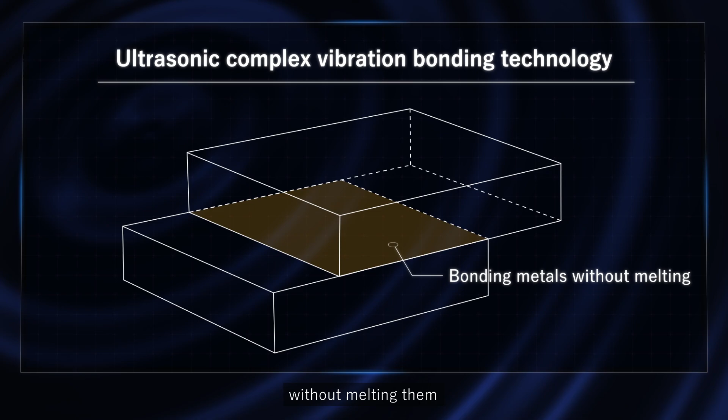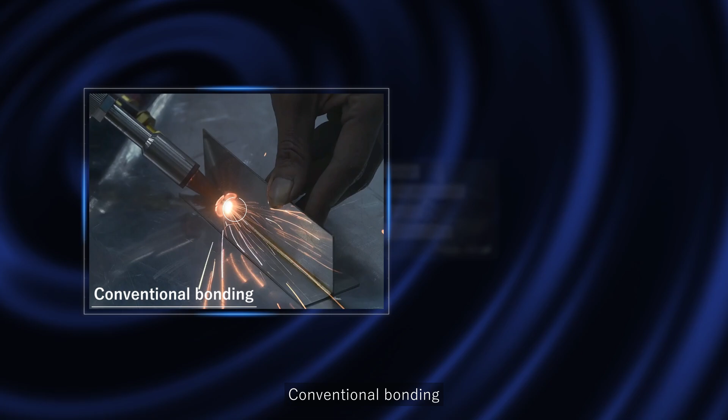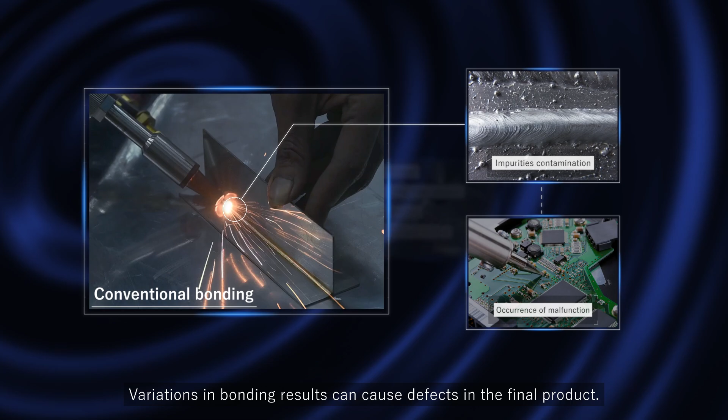Our patented complex vibration offers a number of advantages, particularly in the field of ultrasonic bonding. Conventional bonding generates foreign matter such as burrs and spatter during the bonding process. These issues are considered one of the causes of battery fires. Variations in bonding results can also cause defects in the final product.

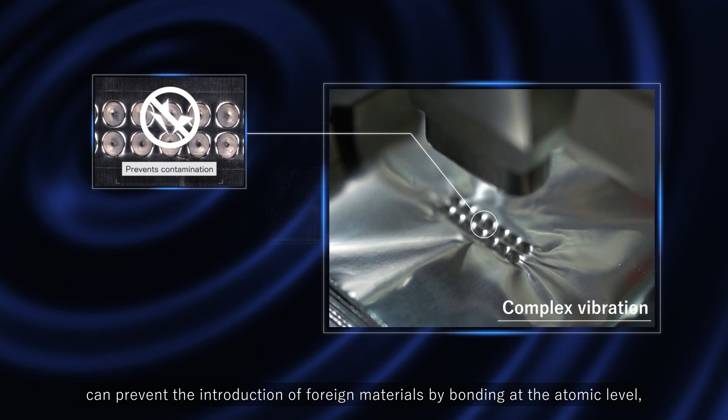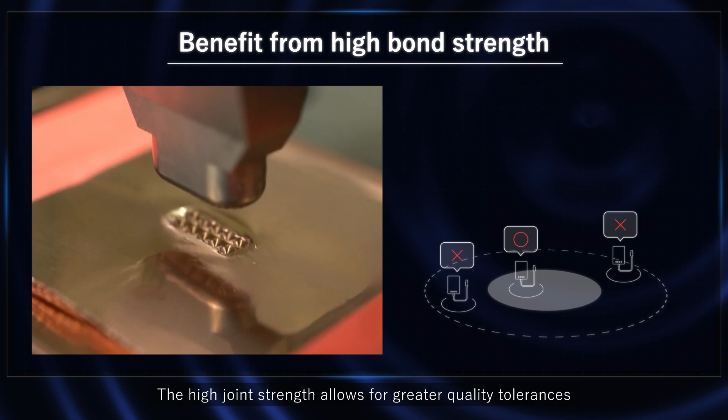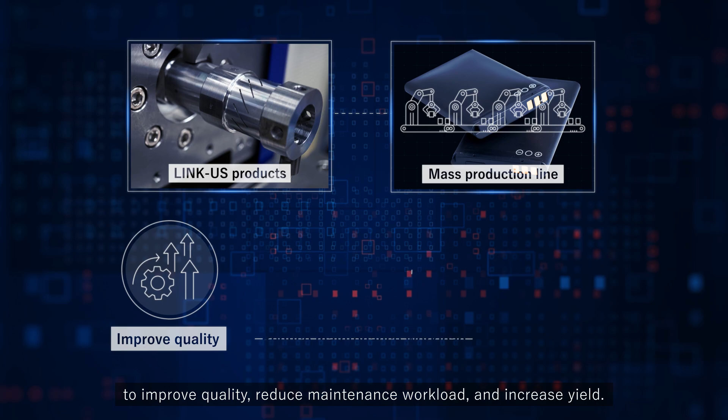On the other hand, ultrasonic complex vibration bonding technology can prevent the introduction of foreign materials by bonding at the atomic level, and is expected to significantly reduce the risk of fire. The high joint strength allows for greater quality tolerances and significantly reduces the product defect rate. Our equipment is being used in lithium-ion battery production lines to improve quality, reduce maintenance workload, and increase yield.

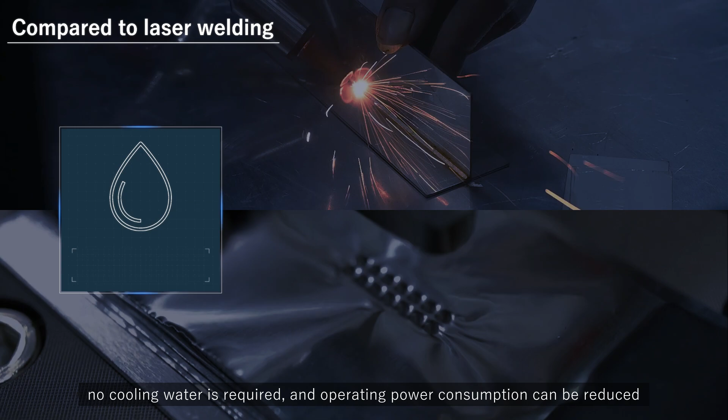Since the amount of heat generated during bonding is extremely low compared to laser welding, no cooling water is required, and operating power consumption can be reduced by more than 90%, reducing environmental impact.

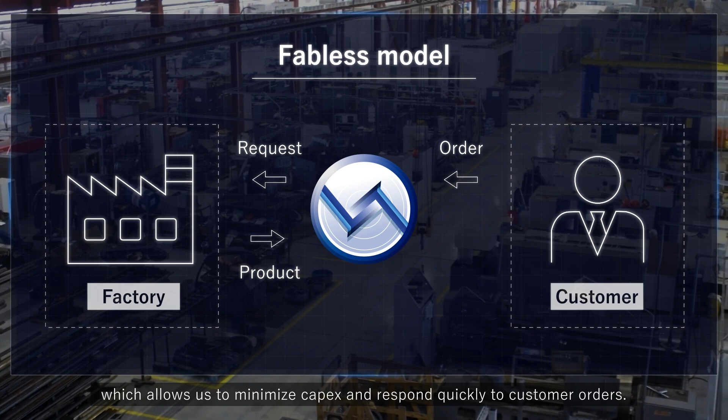Our business model is based on the fabless model, which allows us to minimize CapEx and respond quickly to customer orders. We maximize the speed of R&D as a startup.

In addition to equipment, we also offer consumable products called bonding chips, which are replaced periodically. This enables us to have a recurring model, which allows us to achieve continuous sales and profits.

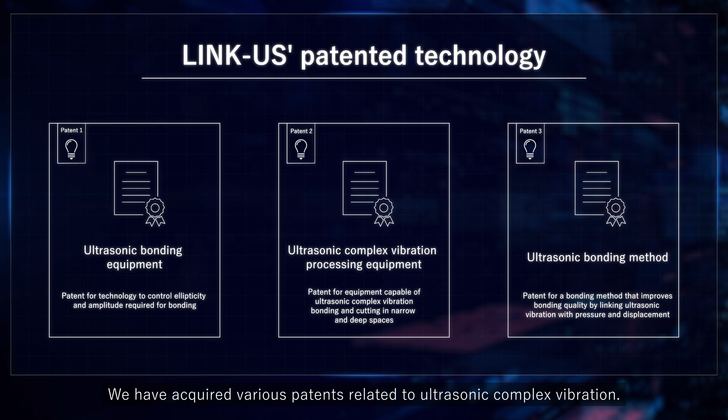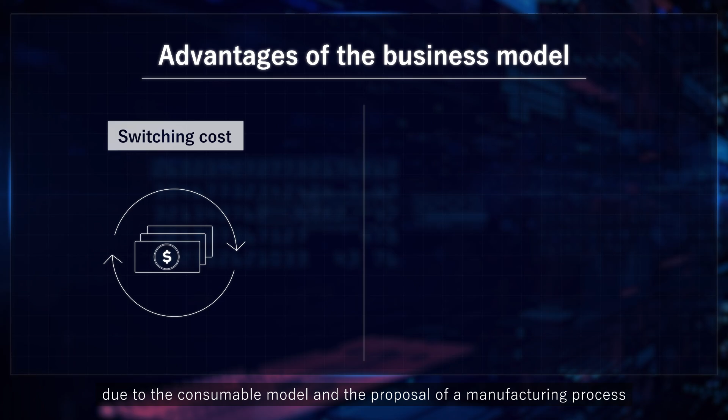We have acquired various patents related to ultrasonic complex vibration. Combined with the know-how of engineers, which is difficult to imitate, we consider this to be a high technological barrier. We have business model moats, such as the high switching cost due to the consumable model and the proposal of a manufacturing process that requires ultrasonic complex vibration.

We believe that the AI acoustic bonding discrimination technology currently under development is a defensive wall against later technologies due to the prior accumulation of teaching data. This will firmly protect our competitive advantage.

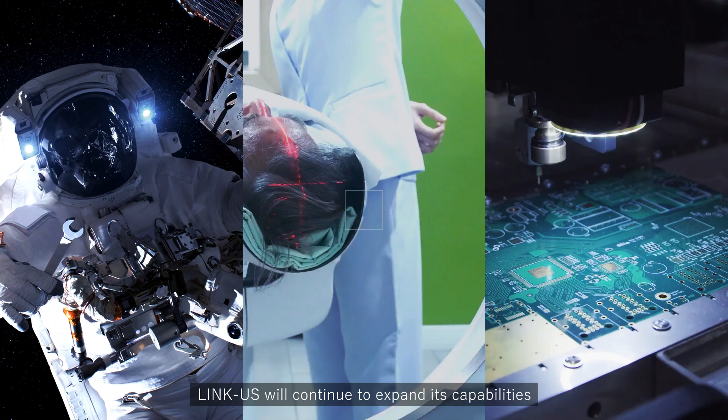LINK-US will continue to expand its capabilities in areas where cutting-edge technologies are required, such as space development, medical fields, power devices, and automotive structural spot welding.